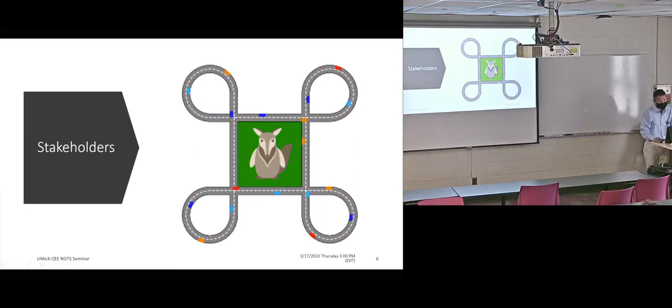Then, transportation may not be as simple as many of those colleagues think, right? Because transportation has a lot of stakeholders, cars, travelers, roads, and so on. Actually, because the transportation system involves human beings, there are a lot of behaviors at different levels, from lower-level engineering choices like car driving on the road, to economic choices like route choice associated with costs, maybe lane choice too, though there's no clear-cut differentiation, and then the choice of arrival time, departure time, trip choice, destination, and all the way to the social.

Because many times where we live and where we work is not really determined by transportation alone. So now with autonomous vehicles, we only have even more players. Google, Apple, Tesla, they are definitely getting to directly play in the field of transportation. And there's a clear hierarchy of all kinds of behaviors.

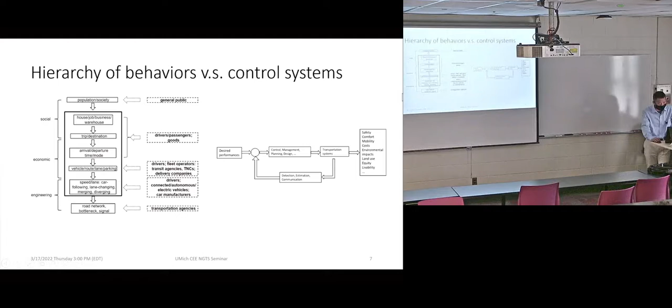Try to alleviate, mitigate, fill the gaps, and so on, to make the transportation system more efficient, safer, and make life better in general, right? So you can see that the transportation system is really complex. Especially, it's not only an engineering system but a social system, and we should really try to take advantage of different kinds of research methods.

Traditionally, there have been first principle methods, like a Newtonian paradigm, basically to discover the fundamental principles from the first principles, and then to analyze them, to derive the conclusions, and so on. Second type is data-driven. Observation experiments generate a lot of data, and then using statistical methods and so on, try to infer some knowledge. Now a very hot, very popular method is using machine learning to learn about people's behavior, for example,

driving behavior analysis. Third type is relatively recent, with numerical simulation, and with more and more powerful computers this becomes more and more important for studying and understanding such complex systems as transportation systems. And ideally, all these methods should work together. Right? And there are disadvantages and advantages of different types of methods.

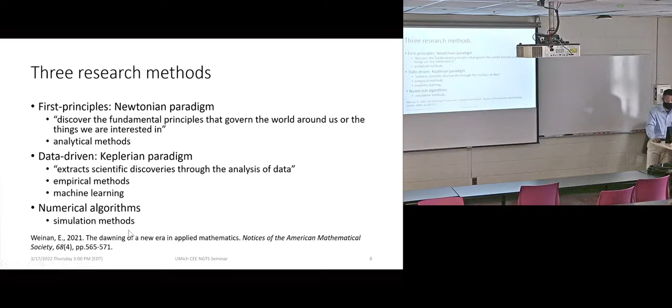While much of my research actually started from first principles, I always try to identify some simple, intuitive principles and then try to see how far we can go, whether these principles will lead to some interesting, useful models, concepts, and so on that can help us to understand the complex transportation problems. And first principles are very important, basically in research and also in engineering. Well known now is Elon Musk using first principles to design new engineering system solutions and so on.

So principles actually have been used everywhere, because they're axioms, assumptions, postulates, hypotheses, except that many times these have been taken for granted, implicit in a sense. But we know that the assumptions many times determine the quality of the results. And we need to take a closer look at the assumptions. Why the assumptions are reasonable. Whether we can still use the same assumptions in the new era of autonomous, connected vehicles.

And this exercise turns out to be very critical when we get to design driving models for autonomous vehicles. Because there have been a lot of car following and lane changing models in the literature, but they were designed in the era for understanding traffic flow. If any of you have been playing with a traffic simulator, especially when it involves lane changing, vehicles can overlap with each other. That's okay, right? Who cares about it? But if we are going to use this lane changing model to control an autonomous vehicle, then that would be problematic.

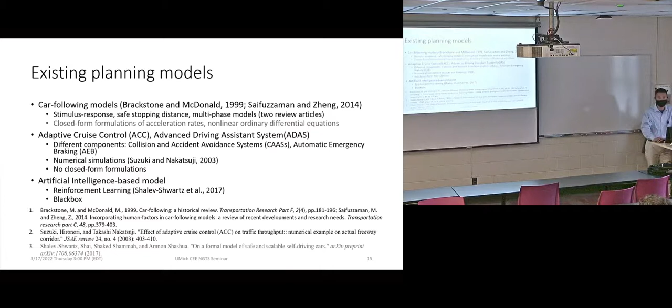For planning, as said, we can still take advantage of car-following models, and there will be adaptive cruise control and AI. There are different approaches, but car-following models still have the advantage that they are mathematically tractable. So maybe we can take advantage, but it's not an easy task. As I said earlier, many existing car-following models just violate the safety principle directly. That means 100% guaranteed crashing. So that has been the motivation.

Actually, first we were motivated by some testing on robotic cars. As said, I come from a traffic flow theory background. I'm used to seeing vehicles cross each other and so on. No big deal. Nobody cares about it, right? Just a number.

But when we implement this on these robotic cars, I was still shocked to see them crash into each other. Okay, so that is where I got motivated on this. But I'm not going to show this. I guess I need to speed up.

But then, what kind of first principles, right? Someone developed a very famous Krauss model. In his dissertation, he said that there are no first principles. Traffic flow is just too complicated. No first principles. But Daganzo did not agree with him. There should be some laws.

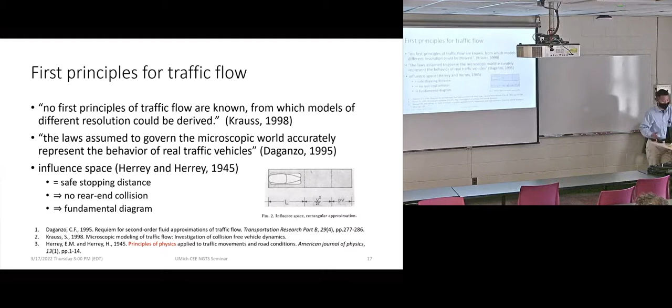And actually, it turns out back in 1945, a couple of physicists were already trying to derive a traffic flow model from a safety principle. Actually, they already derived the fundamental diagram, already derived a car-following model. But this is not so well known, even though it was cited by Newell in 1961, but it was lost in the literature. I'm not going to get into the details of this, but there are some first principles.

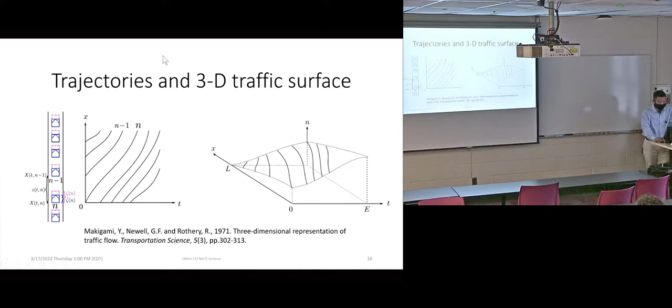But before that, we need to provide a view of traffic flow in the absolute space. We have a bunch of trajectories, and these trajectories can be viewed in the 3D surface of time, of space, of cars. But these cars can be considered as people, right, or social. So we do have space, time, and social dimensions. And then we can define different variables, different coordinate systems, and then we can define some first principles related to trajectory planning here, basically.

For example, collision-free. With respect to spacing, it should be bounded spacing. Bounded speed, for example, should be forward traveling and not much higher than the speed limit. And also if we want to improve efficiency, generally we want to maximize our speed under all constraints. And then there's a fundamental diagram, which actually derives from the safety principle. And bounded acceleration, bounded jerk, and so on.

And these first principles, the fundamental diagram, for example, are actually supported by data. Such a triangular fundamental diagram captures the speed limit, captures the jam density, jam spacing, and it captures the interaction: when vehicles get closer to each other, they tend to drive slower. That makes sense, right?

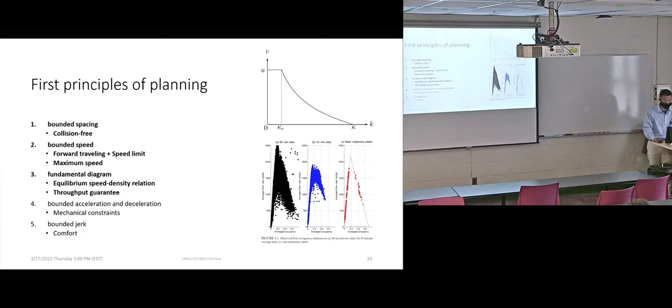However, some models, including the very famous General Motors model, the General Motors car-following model, probably the first car-following model that we learned, directly violate the principle, meaning that vehicles can drive at really high speed when they are bumper to bumper. That is not right. If we want to use them to control autonomous vehicles, or I would argue to describe reasonable driving behavior, that should be problematic. But then again, there are so many other sources of errors. Sometimes it did not matter, maybe.

But then we can use all of this to try to show some interesting relationships. These principles, once you define them, just make sense, right? Those are basic requirements. Like collision-free: spacing cannot be smaller than jam spacing. This collision-free condition actually turns out to be highly related to the CFL condition. I don't know if any of you are familiar with fluid dynamics. That is to guarantee the numerical stability, convergence, and consistency of numerical solution methods.

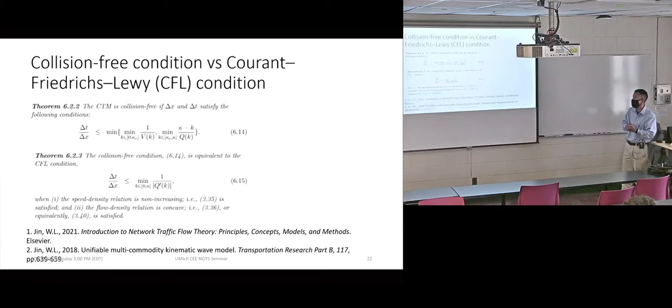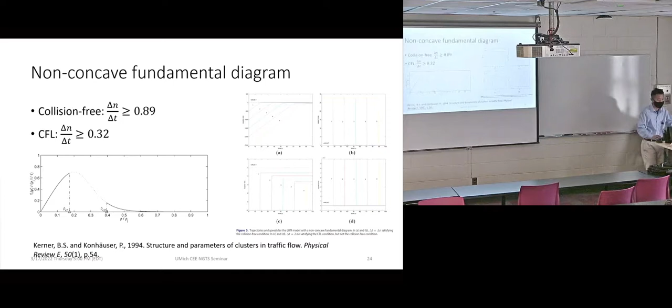Turns out they are equivalent when we have a so-called concave fundamental diagram, and if the fundamental diagram is non-concave, the collision-free condition is more restrictive than the CFL. Meaning that if you just satisfy CFL, a mathematically motivated condition, it is still mathematically well defined, but cars will collide into each other. So probably just using existing mathematical concepts is not sufficient. We want to improve things. Introducing the collision-free condition can help to resolve such issues.

And another thing is that we've done some study. If we introduce bounded acceleration to the model, it turns out this can describe the very well-known capacity drop phenomenon. Not only qualitatively but also quantitatively; it can be calibrated and verified, and can match the trajectories of vehicles very well.

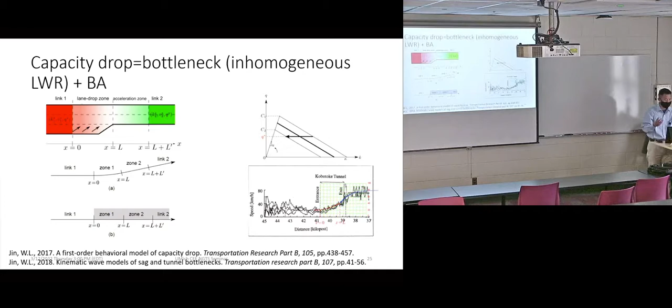So there were 4 vehicles sent through the Kobotoke tunnel in Japan in the 1980s, and they plotted the speed profile at different locations, and we can clearly see that this is the active bottleneck, meaning that after this, vehicles will accelerate and there will be free flow. But inside this, there's already acceleration, and the acceleration profile can actually be predicted by a simple LWR model, which is basically just a conservation law plus a fundamental diagram, plus a bounded acceleration constraint, and so on.

And then with my PhD student, Irene Martinez, basically done by her, she extended this model to decide the optimal location of variable speed limits. The idea is that if the variable speed limit sign is too far upstream, then the queue can block the upstream off-ramp and disrupt other traffic flow. But if it's too close, then it cannot help to improve the throughput by eliminating the capacity drop phenomenon. And she managed to formulate and solve an optimization problem based on the understanding of the traffic dynamics inside the bottleneck and outside.

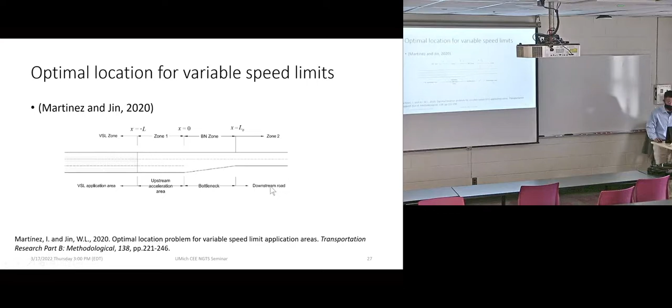And then another recent task actually is to try to develop the reasonable driving model by introducing bounded deceleration. We know that if it's infinite deceleration, okay, this is the trajectory of the vehicles. Infinite deceleration, then there's not much safety concern. Okay, but with just limited deceleration, then how can we model this, and also make it mathematically guaranteed?

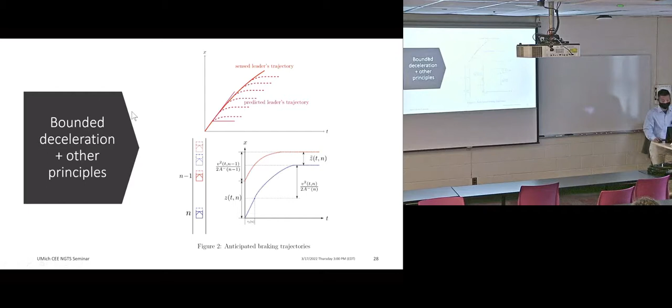Okay. And this is also related to one well-known debate: the criticism and the resurrection of second-order models. Daganzo in 1995 criticized existing second-order models, continuum models, but now we know that continuum models and car-following models are all equivalent, just in different coordinates, different formulations. Just showing that some would lead to backward traveling. Okay, this actually is using one of the principles, while the other criticism, more well-known, is so-called anisotropy.

He showed that for some models, in the homogeneous system, the characteristic wave speed is larger than vehicle speed. Then he argued that the information travels faster than vehicles, and that's not reasonable. And then there have been the resurrection efforts, okay, including the well-known Aw-Rascle-Zhang model, by designing a model with characteristic wave speed less than vehicle speed.

But actually, now, I think this model, Aw-Rascle-Zhang, including the General Motors model I mentioned earlier, they all violate the collision-free condition. So they are not safe. So they address the criticism, but propose some very unsafe models. So something has got to be wrong.

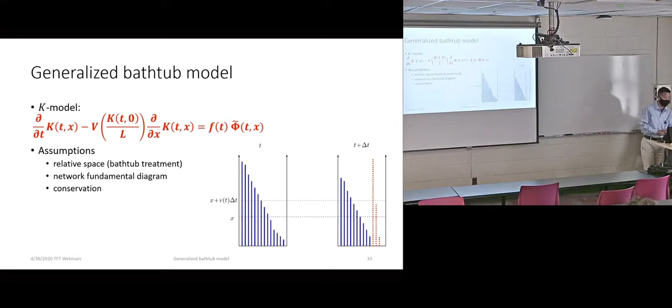And then actually we have the model. I don't have time to get here, but the assumption here is that we are using relative space X, and we use the so-called network fundamental diagram. Assume the average traffic speed depends on the number of vehicles in the network. That makes sense. The more vehicles, the lower the speed, right? And then conservation, and then we would reach this kind of PDE.

And if we assume the trip distance follows a time-independent negative exponential distribution, actually this can be simplified to an ODE. This actually turns out to be a very famous, very hot topic in the recent traffic flow community. It's the MFD-based model. I don't know if you've heard about it. Initiated by Daganzo, 2008. But it turns out Small and Chu had this already.

But it turns out Vickrey had this in 1991 in an unpublished manuscript. And when I was studying the problem, I got a copy from Columbia University. And it turns out on the first page he talked about it, and he clearly stated all the assumptions that you need to derive the ODE.

Turns out, Small and Chu and Daganzo all did not explicitly state the condition on the negative exponential distribution, such that many followers actually use this model incorrectly for constant trip distance and so on. So that is something very interesting.

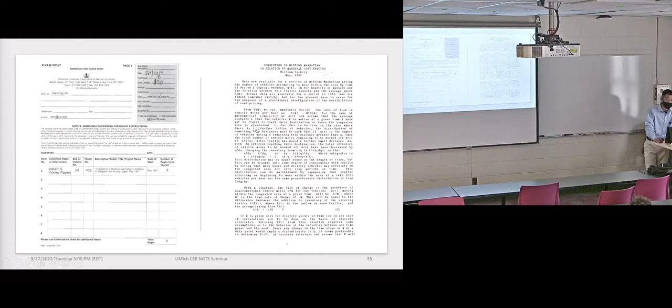So I always say the transportation field is pretty young, started in the 1940s, 1950s, right? It sounds like a lot of time, but put in the history of science, this is a really young field, and we should go back and read the literature all the way back. There are a lot of great ideas, and Vickrey derived things exactly from first principles, from the assumptions, clearly stated them, and then derived the very nice model. But they were rediscovered, reinvented.

Now, this citation, before the publication of the 2020 version that I and Professor Richard Arnott helped to edit and publish in Economics of Transportation, was not well known at all, just a handful of citations. But if you check out the citations of Daganzo, even Small and Chu, hundreds, thousands of citations. Okay, but I have to say that Vickrey did it earlier and did it better in this case. And then other work too.

But comparing the LWR model and the generalized bathtub model, we see that there's a lot of similarity, except that one is absolute space and the other relative space, and there are parallel developments and a lot of possibilities. Can I ask a quick question? So in what sense is it relative? Is x the distance remaining? Yeah, exactly. They are remaining distances.

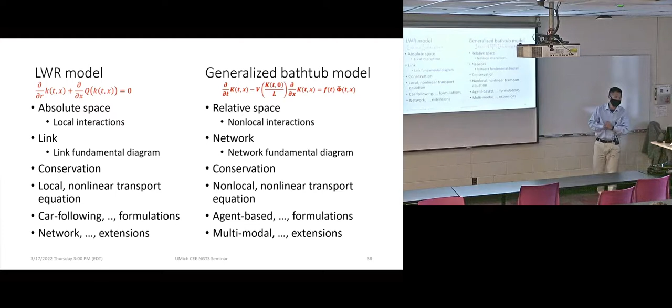And actually, in our recent study, we found that it's more than just a model. This represents a new paradigm for transportation system analysis, not just for traffic flow modeling, but also for planning, for everything, okay? I don't have time to get to this, but basically, this is another view.

And one really nice property is related to the absolute space. If you are tracking people's origin, destination, route, path and so on, that's their personal identifying information: their house, their office. But in this relative space, you don't know anything, right? You just know how far they are from their destination without knowing where their destination is exactly. So this actually is privacy preserving, and this can have really profound implications in many regards.

And we are extending this not only to solve the traditional problems but also to address the privacy issue and equity in data collection. But you still have to know the destination, right? No, we just need to know how far you are from your destination. You don't have to tell me where your destination is. Every time, you tell me how far you're away at a certain time, just like estimated distance to arrival.

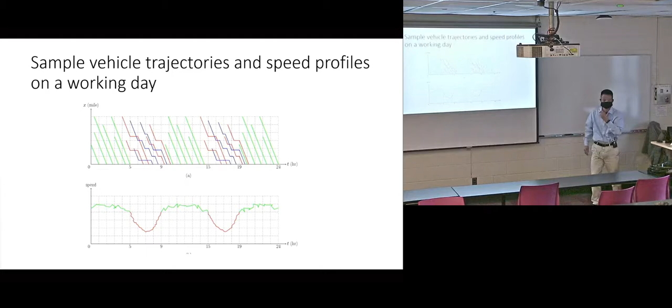You talk about traffic assignment, right? When you compare, there's traffic assignment and the TAZ. The purpose there is to get the link distribution, to estimate the flow or traffic speed on each link. Yeah, so this is of course the traditional way of viewing traffic assignment. Now maybe we don't have to look at that detail; it's very computationally expensive. Maybe we just look at it by zones. Right, but even by zone, if you consider spatial heterogeneity, then you have to consider destination. Oh yeah.

There will be destination, but the destination can be much closer. Right. Then, actually, we are doing some work: you can consider the whole freeway network as one network, and we don't care which on ramp you get on, which off ramp you get off. You kind of get what I mean. So it depends, of course.

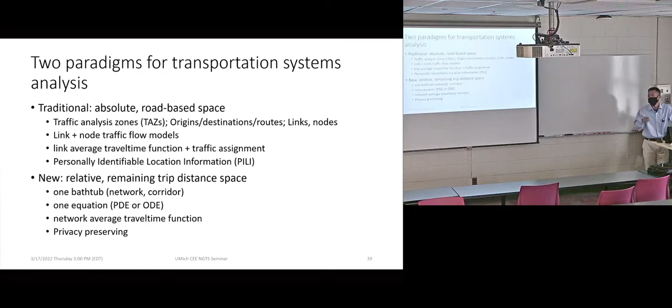If you are interested in a link level, probably this model is not that useful anyways. Probably you want to get back to the traditional. But for large scale network, this provides a really nice simplification. Just like a bathtub model. Bathtub model is not a replacement of LWR model. It is a nice addition, or complementary.

And the third one, I briefly talked about it, and the basic message is that we can talk about this departure time choice as a traffic flow problem, just on an imaginary road. I was totally motivated by all the debates with Professor Hai-Yang and others, and they show that this day-to-day choice on departure time is not stable, and after examining 5 or so dynamic systems, they try to conclude that there's no stable departure time choice pattern.

I said no. According to my experience commuting to UCI, there is a pretty stable scheduling pattern. And also logically, you show 5, even if you show 5 million that are not stable, it does not mean there's not one hiding somewhere that's still stable. You get me? Actually, I already knew the instability back in 2005 or so, but I always believed there should be a stable one, so I did not publish.

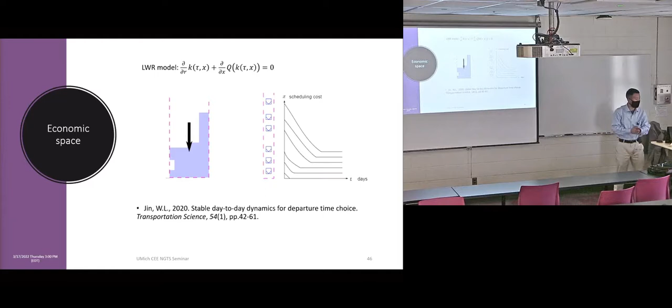But anyways, then I went ahead and tried to construct one based on some simple principles, convert that to a traffic flow problem, and show that it could be stable. The interesting thing in this context is that the travelers are effectively traveling in the economic space. I don't have time to talk about this, but these are all based on the bathtub. This view can be very useful to provide mathematically tractable formulation for network problems with many interacting bottlenecks, on ramps, off ramps, and so on.

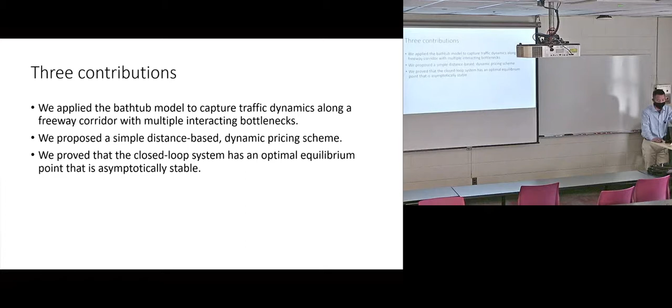So basically the idea is to use the bathtub model, and then we have a simple distance-based dynamic pricing scheme. And we can mathematically prove that the closed loop system is stable and has an optimal equilibrium point. This is not sufficient, but this helps to design a practically viable scheme in the real world.

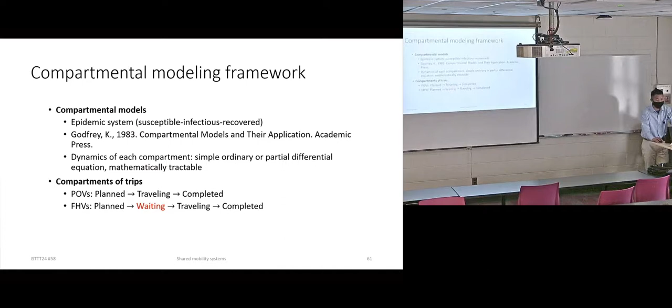And then for shared mobility systems, we show that the pooling rate and the extra mileage rate are very important, and also that the current practice by Uber, trying to minimize the waiting time, is not viable. Actually, it can increase congestion. If we really want to reduce congestion, we have to cap the number of vehicles in the network. And we provide, again, bathtub models and some mathematical discussion and formulation on this.

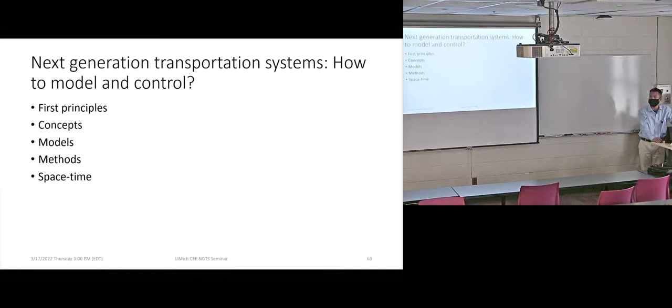So I want to get to the discussion part. Now we get to the next generation transportation system. Definitely a lot of new opportunities and challenges. But I do believe these first principle concepts, models, and space-time are all relevant, maybe even more relevant than before. The first principle approach can still be a very important approach to solve a problem, to provide mathematically guaranteed properties. This will help us save the expense on tests, for example.

And the theory alone can be very useful, because it provides a common language to clarify concepts, inconsistency, contradiction in the literature. So in general, we need all. I'm not saying that everybody should only use one. If you are interested in artificial intelligence, good. But you may still benefit from the first principle approach, this kind of language.

And then it depends on your style. For example, my style, I like to work in a small group and read literature, not organize all the tests. I have a heavy weight on the first principle approach. But at the same time, I'm paying attention to the data. We've been doing a lot of data analysis, and even robots. We developed a simple robotic car testbed.

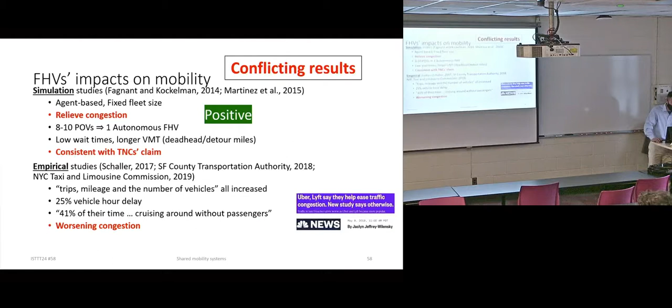No. For example, when we collect the information, we ask everybody to report. You just need to report the timestamp and how far away you are from your destination, as long as you are in the network that we are concerned with, of course. We don't care where you are really going, which route you are going. Because in link-level models, you can have loop detector data, whatever, to measure the performance on each individual link. But here you need the entire information from everyone, right?

That's a good point. Definitely there's a potential to have privacy preserving. Actually, I've been working on one with a master student to show it's possible. But what kind of detector we want to have, things like that, there could be some. But at least GPS can do that already. Just report it. You save your own route, you still use those for navigation. But when you report, just report this kind of relative space information.

So it's assuming that they know their route, right? Yeah, they know their routes. So do you go into details of choosing that route? No, but definitely a route choice problem can be defined. If we have multiple bathtubs, for example, you have one zone and a couple of other zones. Each one is a bathtub. This is actually related to the multiple bathtub traffic flow model too.

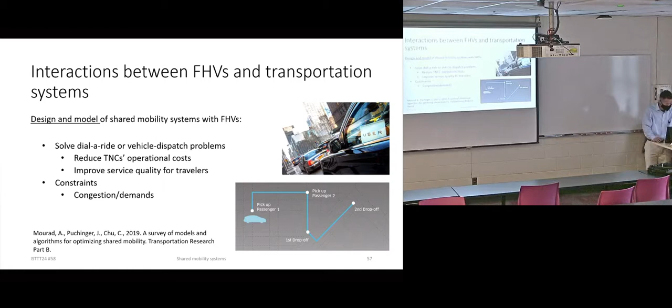On the topic of the day-to-day equilibrium model, one of the impressions I got from reading was that it's really hard to achieve stability without some sort of history or look ahead. I was wondering if that's what you used in your work, or if you managed to avoid that. Yes, this is a really good question. We do have some discussion with colleagues regarding day-to-day departure time choice. You've got to have some knowledge regarding the current day or the past days, right?

So here, as a first attempt, I was very relaxed in this assumption. Assume we know all information: the current day, how many people arrive at a certain time, their queuing time, scheduling costs. However, it turns out one biggest distinction between this model and the existing model is that existing models assume people can switch to any departure time that has lower cost at a global scale. But this turns out to be local, in the sense that they just search the departure times around them.